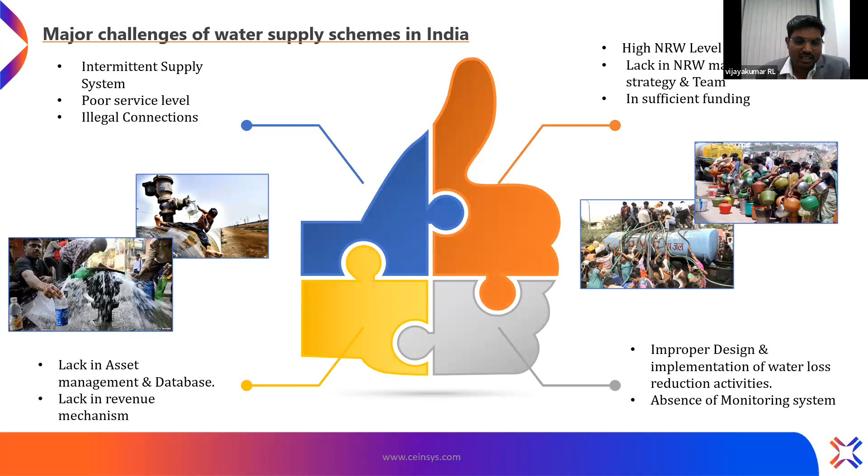Conducting a comprehensive survey is a crucial activity as the entire design and implementation process relies on accurate survey data. So it is essential to keep in mind GIGO: garbage in is garbage out. So what are the drawbacks we have observed during the survey? The surveyors may lack sufficient understanding of the core purpose of the survey and the specific data that needs to be captured, important details such as number of flats and storage capacity of the property, the pipeline alignment, whether the pipeline is on the right side or left side of the road, the economic condition of the location, alternate water supply, etc.

Sometimes people will do the consumer survey by manual writing on paper and submit it. So what will happen? This manual process makes it challenging to accurately assign the consumers to specific DMA boundaries. Then improper address details, lack of consumer support, and sometimes inability to access closed doors. The surveyors may or may not revisit the property, so those are the drawbacks there.

Then the size and material of the pipeline may not be accurately confirmed during the survey by sufficient trial pits, and the use of less accurate GPS may compromise the precision and reliability of location data captured during the survey. Also, challenges may arise in tracing with devices like pipe locators and GPR, and accurately capturing data, due to the unorganized installation of other underground utilities where the pipelines are laid, defunct pipelines, and the presence of RCC roads. So these are the major drawbacks.

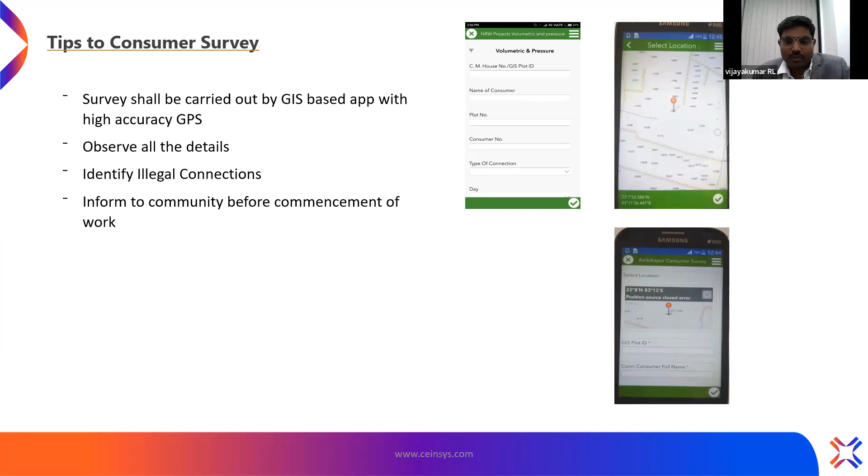You can identify the illegal connection, and at the same time we can identify leakage in the ferrules and the house service connection. Also, the person should at least go to check whether they have one or two inlets, and whether meter bypassing is there. So these are the tips. Then inform the community before you commence work by awareness programs or notices. That also we did during our survey.

So, asset survey. Whenever you are doing the asset survey of the existing network, we have to capture the administrative boundaries such as ward boundaries, constituency boundaries and the water supply zones. See, water supply zones are not a single boundary. In Indian cities, even in a small area, there may be pocket-wise flow supply. So at which time and where they are giving the flow, that flow boundary also has to be captured.

Then observe details like pipeline alignment, whether on the left side or right side, the depth of the pipeline, the fittings, materials and size; all those things we have to observe during the survey. Then identify the position of the valves. If they are operating valves, we have to collect the operating schedule of the valve, what time it will open and close. If it is a throttling valve, we have to understand the position of the opening, whether it is open one round or two rounds. And whether the valve is permanently closed, whether it is a boundary valve, etc., we have to capture.

Then employ multiple methodologies during the survey, including visual inspection, pipe locator, GPR, box locator to identify buried valves, trial pits, analysis of old maps, engagement with local communities and technical assumptions. All those things we have to capture during the survey. Then you have to capture the nearby underground utilities as well.

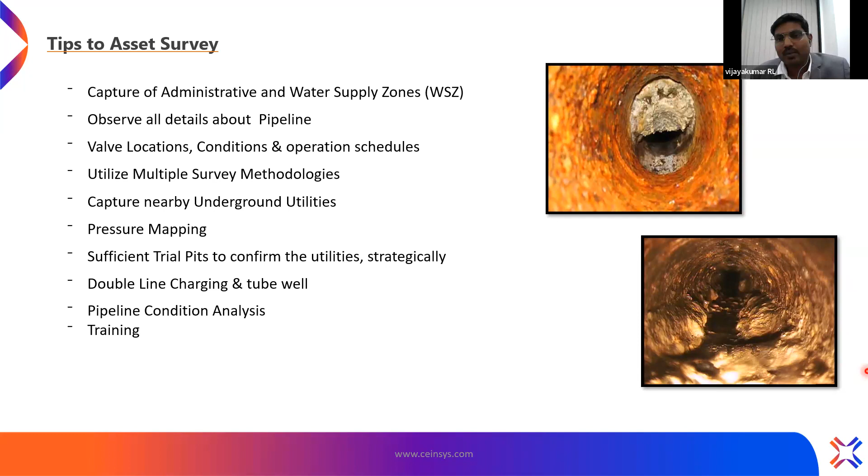So that is why during the survey you have to map the tube well, if it is a tube well which is directly connected to the network. Then pipeline condition analysis also you have to do by trial pit, and you can insert the leveling camera inside the pipeline. This photograph shows the leveling camera which we have inserted. See the incrustations and blockage inside the pipeline. So these are the pipelines we can go for replacement. So it will give some idea about the entire existing network.

Then I just want to give some tips regarding the modeling. Whenever we are doing the modeling in the intermittent water supply system, and we are going to implement water loss reduction based on that modeling, these are the points we have to consider, and we did in some of the projects. So first of all, consider the surveyed population for the base year instead of the projected population. Generally the client will put it in the scope that you just project the population based on statistical methods. But what we did is consider the surveyed population. Why? Because we can calculate the accurate population density along the area.

At the same time, fine tuning can be done by analyzing the error between the projected population and the surveyed population. For example, if for 2023 you have calculated the population based on some statistical method, and at the same time the actual survey is there, if you compare the values, it will give the error analysis. So based on that, you can tune up the future population which you are going to design for, and adopt the peak factor based on the actual supply hours.

But see, if you adopt a peak factor based on the actual supply hours, as per the Indian scenario, this can lead to unnecessary capital expenditure, because we know we have supply of 4 hours, 5 hours. So if you adopt the peak factor based on that, the peak factor may be 6 or 7. So it will increase your capital expenditure. So in general, we always consider a peak factor of 3. In that case, after the implementation, you have to ensure that you extend the supply hours, because we are designing for a peak factor of 3 and giving supply for 2 hours, so definitely the network won't work efficiently. So we have to increase the supply.

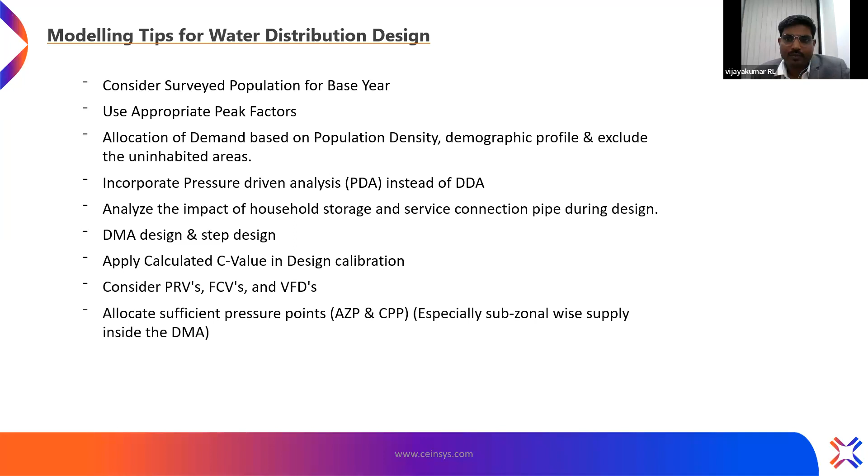Saturation time is nothing but when we start the supply into the DMA. Initially in the intermittent supply, first the pipe will get filled. After that the pressure will improve in the network, then it will go to the consumer end. So in a 4-hour supply, we get only very few hours to do the leak detection in the particular area. Once the saturation time is reached, very soon the supply will get closed. So that's also a problem we have faced.

Then pumps: in some areas where low pressures are there, consumers directly connect pumps into the network to suck the water, which drastically reduces the system performance and the system pressure. The challenges with the infrastructure are the high thickness concrete roads, tar pavements and RCC roads. These hinder leak detection using acoustic equipment, because the leak sound dissipates before reaching the surface, and sometimes the repairs are also more complex.

Then unknown taps along the main and submain create challenges in leak detection, especially using the leak noise correlator. In Indian conditions, we cannot efficiently use the leak noise correlator in a service pipe, because whenever the supply is there, all the house service connections draw water, even at the end of the supply. So it won't work efficiently in the service pipeline. So we have used the leak noise correlator in 150 mm and above diameters.

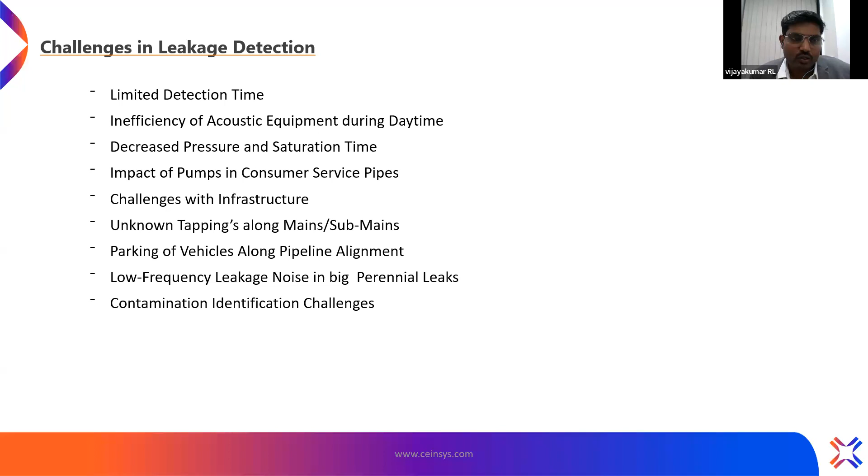So based on these challenges, we have adopted some practical solutions which we used while doing the leak detection. Initially, coordinate with the urban local bodies for nighttime supply, and you can extend the supply. Wherever nighttime or extended supply is not possible, we have used the tanker method. We cannot put water in the entire DMA. Based on our analysis, you have to identify the leak-prone area and some small pocket. You can pour the water from the tanker, pressurize the system, and start leak detection using the tanker method.

Then start the leak detection after saturation, as I have already said. In the initial stage the pipe will get filled, so you have to wait for the pressure to improve. If it's not possible, then we have to artificially improve the pressure. Then monitor the real-time flow rate. If you monitor the DMA meter while supplying, initially the supply will start, then it will go to some flow rate.

Near the end of the supply, the fluctuation of the flow rate will be somewhat less. I'm not saying that fluctuation entirely contributes to the leakage flow, but in every supply we can compare whether, up to this point, my flow rate has increased or decreased, and what about my pressure. When the system pressure improves, automatically the flow will reduce. So that is the analysis, and again it depends upon the interpretation of the person.

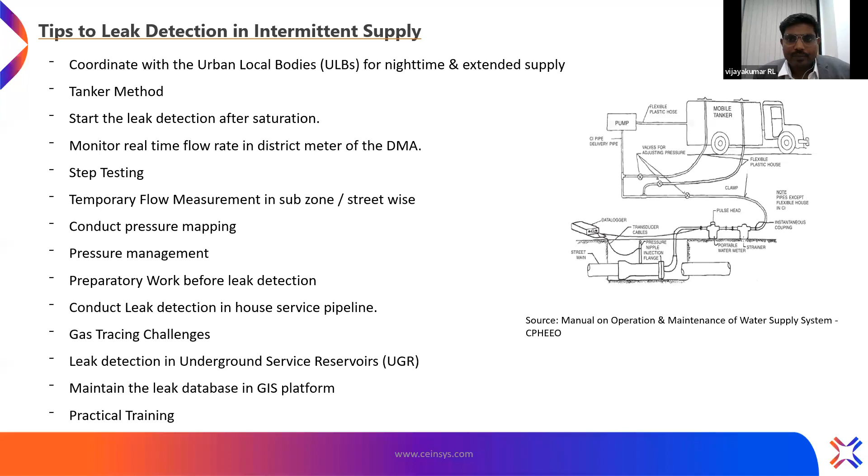So based on the conditions, this is the active leakage control which we adopted in the intermittent water supply system. One is increasing flow and flow analysis, and AZP, CPP, these monitoring activities. Increasing flow means we have to monitor your flow and AZP, CPP condition daily. Once the flow increases, you can forecast up to this month where my NRW will reach. Based on that, you can monitor. Then detect.

And when you walk on the road, suppose in the pipeline alignment, if you find some dents, that may be due to the leakage. Because of the leakage, erosion happens, so that's why the road becomes dented. So that is also possible. Like that, there are a lot of possible ways you can understand. That depends on how you are interpreting that. Then pressure mapping, I have already explained. The network modeling after the calibration will also guide you to identify the leak point area.

Then locate the leak. After detecting the particular area, you have to again go for the particular location, in which location in that pocket the leak is happening. So we have used the LNC, ground microphones, gas tracer and pocket flow measurement. Flow measurement is nothing but, as I said, the water balance, but inside the DMA, so that we can understand which pocket is contributing more towards the consumption, I mean flow rate. Then confirm the leak. We have used listening sticks and ground microphones.

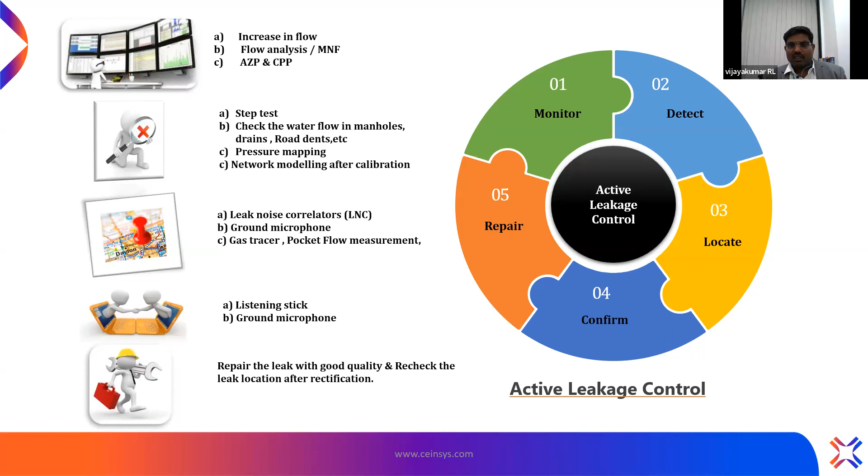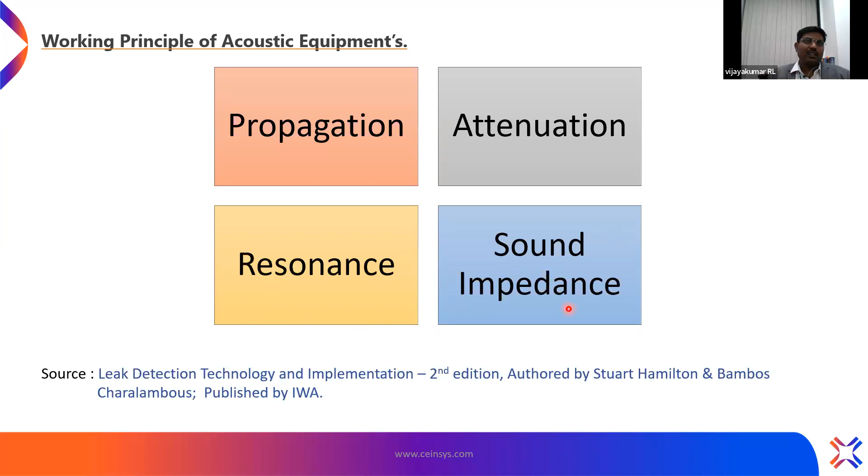So this is the working principle which I have studied. The book was published by IWA, and another by Mr. Stuart and Bambos. When I started my leak detection, this book guided me a lot, so that's why I want to put it over here. As I have said, acoustic equipment has a lot of issues, like PVC pipelines, the depth of the pipeline, and high density concrete and pavement. These are the main limitations, because of resonance and sound, the principle of the acoustic equipment. What we have learned is we cannot change the laws of physics, but at least we can create situations where we can meet the limitation. That is what we did in a possible way.

Apparent losses are caused by illegal connections, customer metering inaccuracies, data handling and billing errors, and underestimation of unmeasured consumption and freebies. These are the things we did to identify the apparent losses. One is the open sounding, as acoustic we have used. We regularly send our team to identify that. Then consumption analysis, which is nothing but the data analytics of your consumption data. You can analyze based on the particular demand of the property against their consumption, and you can track their regular consumption. So there are a lot of things.

Regularly the meter was calibrated, and if there is any damage, meters and all we have replaced. The inter-personnel change to avoid the corruption, so we frequently have inter-personnel change. The vigilance wing also we implemented.

But then capital work: if you feel in a particular area there are a lot of illegal connections, and at the same time those connections are very old GI pipelines which are also leaking, then before that you have to do a real ground reality study. If you replace the house connections, that will help us to avoid the illegal connections also. And one more thing is that we have to replace the connections with authorized personnel only.

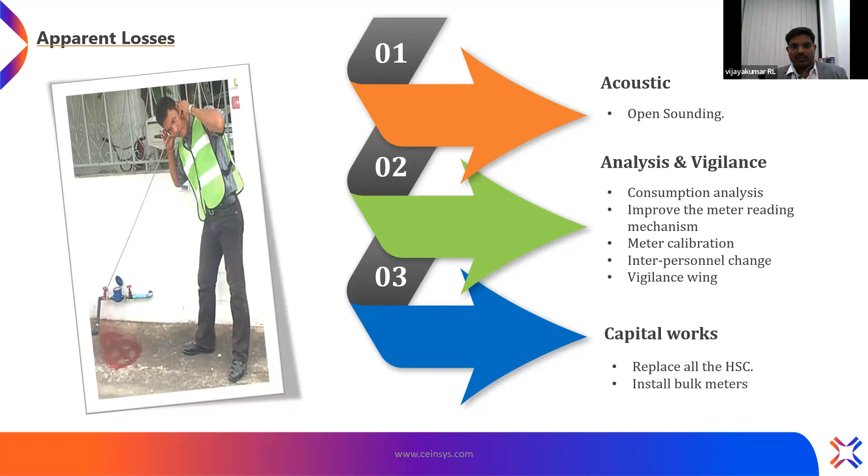So some of the construction tips. De-linking of existing pipeline to avoid double line charging, and tube wells, which I have already explained, how they contribute to the water loss. Then hydro testing and leak testing. Normally they will do hydro testing of the pipe, and after that they will install the house service connection. But what I am recommending is, whenever your ULB implements water loss reduction activities, hydro testing should be done along with the house service connection.

There is one example from my experience. We replaced some pipeline and gave the house service connections, then the NRW level increased above the previous level, actually by 20%. After we analyzed, we identified that most of the leaks were from the ferrules of the house service connections. So after that we adopted hydro testing including the house service connection, so that repeated work does not happen.

Then replacement of problematic pipes, that is PVC pipe, old leaky pipe, damaged pipe, will be replaced immediately. Then flow control: installation of flow control valves at the ferrule. The figure shows the flow control valve that you can install, so you can ensure equal water distribution to the system on the consumer side.

Then install consumer meters in the boundary walls of properties for easy access. Normally what we have observed, someone kept the meter inside their home, someone inside their kitchen. So it is better to keep the meter outside the boundary wall with a proper protection box, so that it is easy to do the sounding method also, and we can easily observe the reading of the consumer properties without disturbing the consumers.

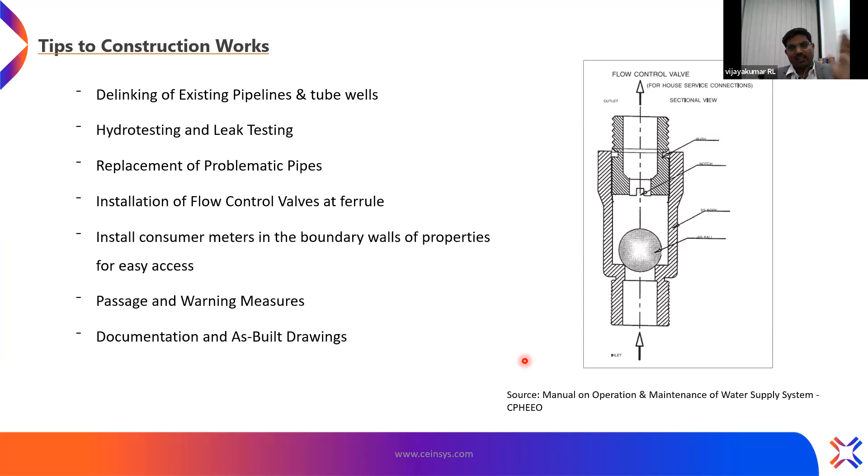So the ULB should calculate the ROI, return on investment, in the long term before initiating any work. It is crucial to invest capital cost strategically based on the amount of water saved and the resulting increase in revenue, rather than blindly investing in capital expenditure without considering ROI analysis. So we have to consider the ROI analysis.

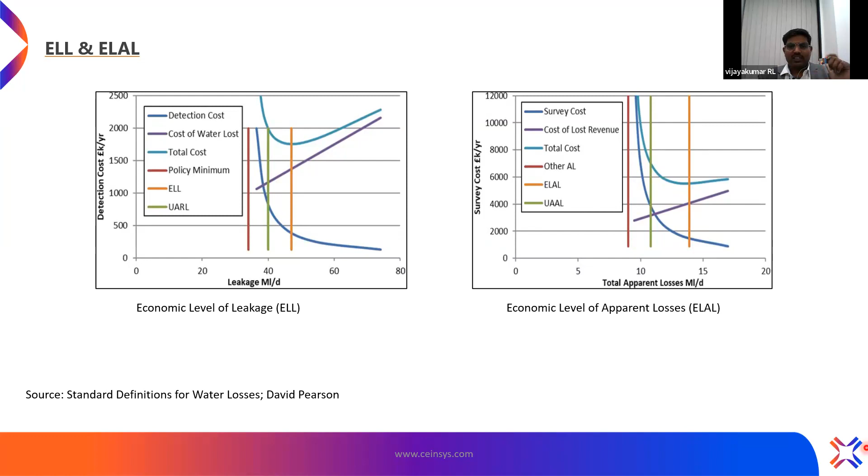And again, one more thing. It is important to note that achieving the targeted NRW level in an intermittent water supply system does not imply that the target has been fully achieved. It is crucial to consider that increasing the supply levels in a DMA can lead to an increase in NRW level. So if you are achieving it in intermittent supply, but you increase the supply, definitely the NRW will increase. So NRW is not a one-time task. This everyone should understand.

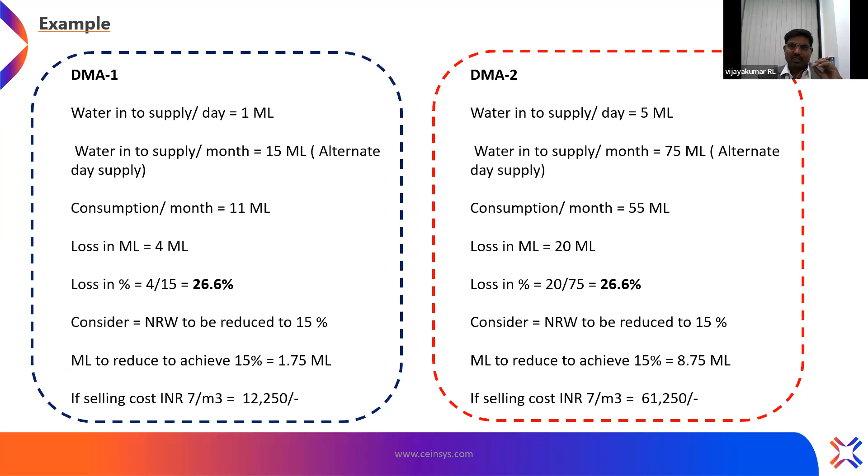Valve let-by may happen due to improper closing of the valve. At the same time, due to poor maintenance, silt is depositing in the groove of the valve, hence the gate cannot fix in the valve, so the person is unable to close the valve. Due to the valve let-by, a small flow is continuously flowing into the DMA at negligible pressure. So definitely it won't reach the consumer end, rather it will go to leakage.

So if it is an intermittent supply, close the valve properly, just close it. That's the thing. These types of cases also we have identified. Then we informed the ULBs and we closed the valve. If the valve had a problem, then we replaced the valve. After that, we reduced a lot of water losses due to this valve let-by.

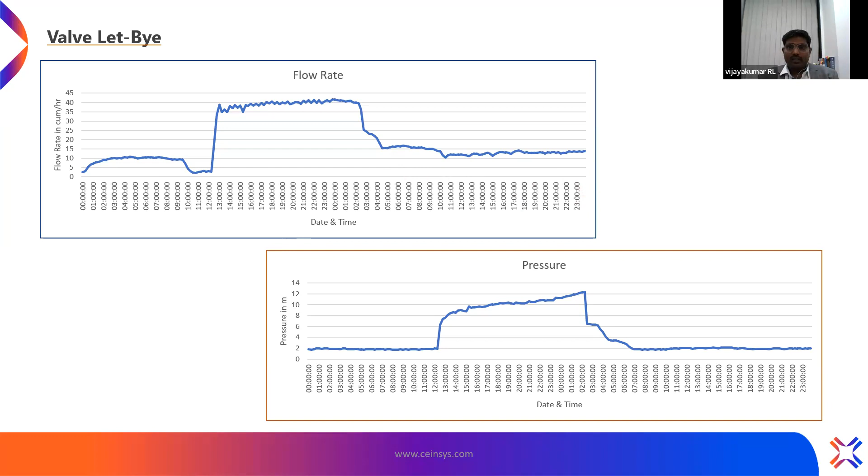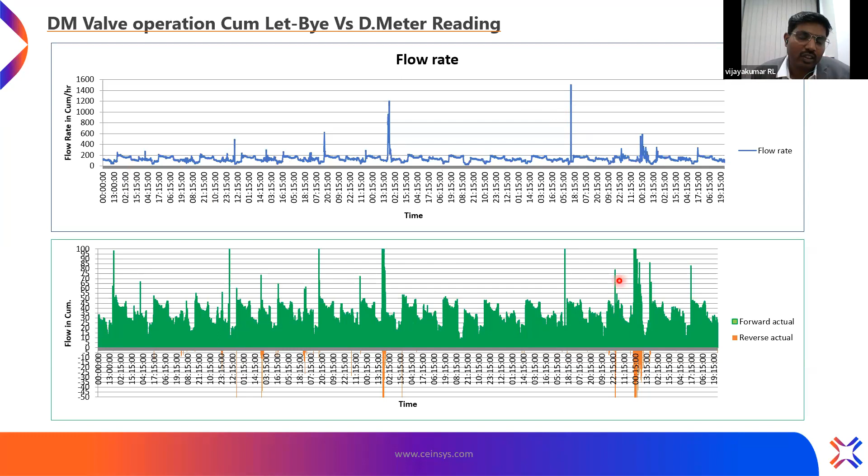So these spike cases we also have to monitor, because the spikes are very high, 1600 cubic meters per hour, where my actual flow is within 200 cubic meters per hour. So if it happens continuously for a month, it will again increase the flow. So the DM is the heart of the DMA. So we have to take care of and monitor the DM meter also.

Vijay? Sorry, Vijay, I just wanted to let you know we already reached 40 minutes. Thank you. Yeah, just give me 5 minutes.

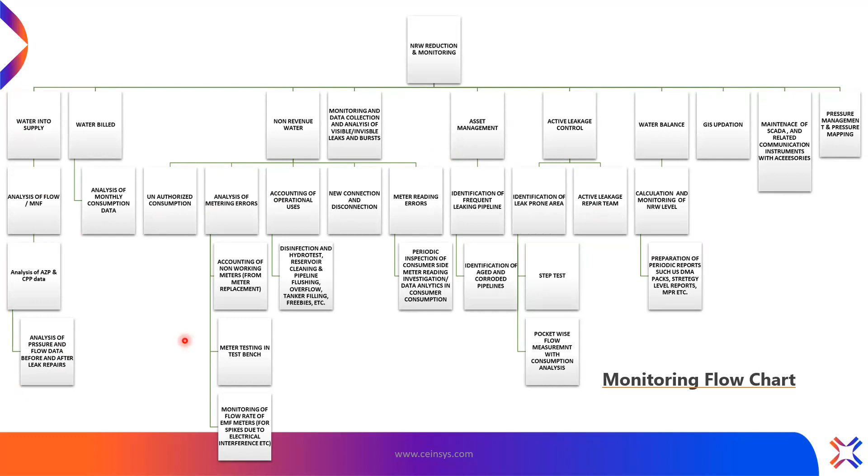Okay. So water bill and non-revenue water. So unauthorized consumption happened this month. Analysis of metering errors and accounting of operational uses, new connections and disconnections, and meter reading errors. Then asset management, active leakage control, which I have already explained. Then water balance team, then GIS updation, then maintenance of the SCADA and related communication instruments. Then pressure management, pressure mapping. So this is the team composition we have used.

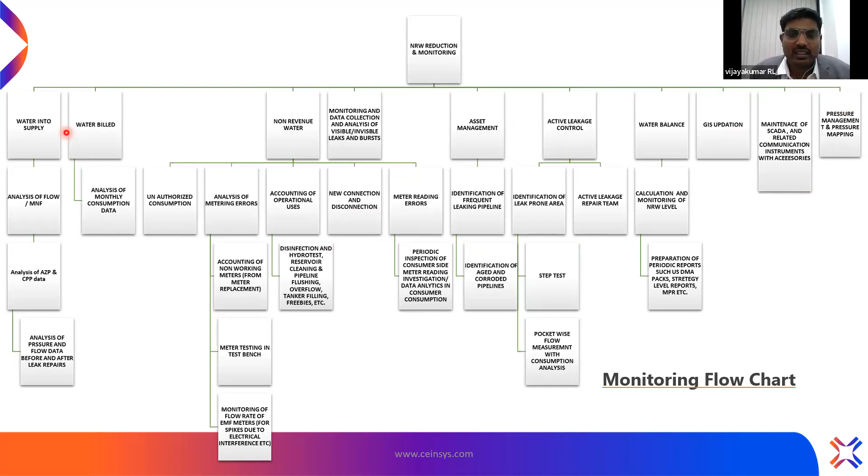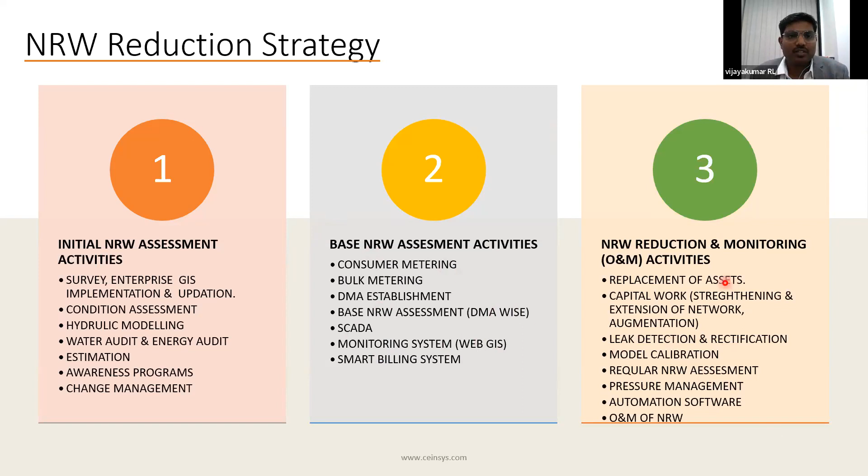Then finally, the paradigm shift. Effective non-revenue water management is vital for a sustainable water supply system. So recognizing the need for a paradigm shift in NRW reduction, here I am presenting a set of guiding principles that can be adopted by ULBs seeking to transform their approach. What I want to guide the ULBs on is that they develop a preventive concept. So you have to take proactive measures like maintenance.

You have to improve the maintenance, leak detection you can do. It is not that we have to wait for the entire thing to get installed, then start our leak detection. We can start it right now itself, with whatever we have. Ensure sufficient funding, then reorganize the organizational structure and establish the NRW special task team, then improve the revenue mechanism. Nowadays, if you observe in India, a flat tariff system is going instead of the consumption based.

If somewhere consumption based tariffs are there, the tariff is very low. So we can go for the telescopic tariff, use less pay less or use more pay heavy. Like that, the concept we can adopt. Then you have to improve the competency of your employees, like practical and task-based trainings. Then mandate the use of effective indicators.

Until now we are assessing our NRW level percentage-wise, but there are a lot of indicators like ILI. So we have to come to the next level to identify all those things. And ensure the competency of the implementing agency. We have to ensure the competency of the implementing agency, and at the same time the personnel who are going to be involved in your works, that is also very important.